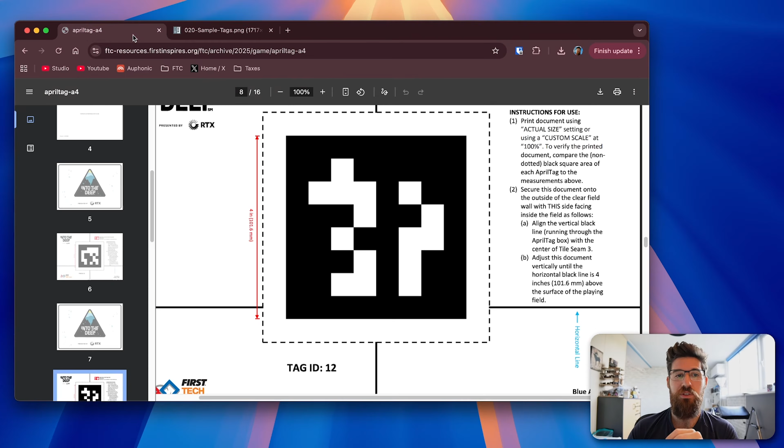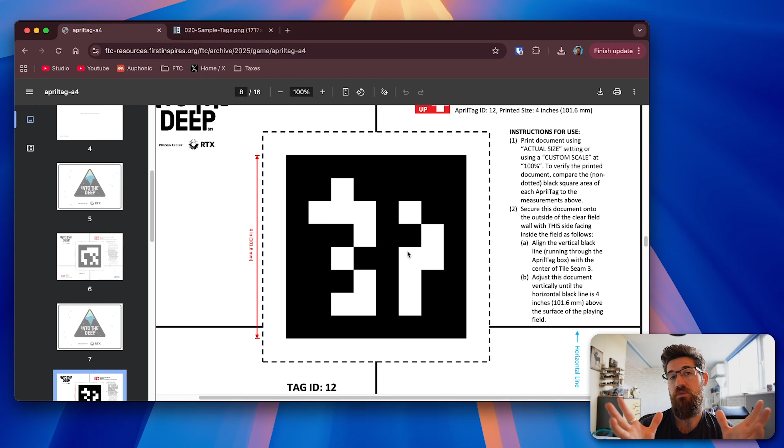Well, the cool thing about using an AprilTag is that it allows your robot to know where it is in physical space. So the robot can look at this tag, provided it's got a map uploaded of where this tag should be. Think of it kind of like a park map. Tag 12 might be the gorillas. Tag 13 might be the elephants. And if the robot sees tag 13, then it knows it must be near the elephants.

But not only does it know that it must be near the elephants, it can tell how far away am I from the code, how far to the left or to the right am I from the code, and how far up and down am I from the code. And not only that, am I looking up at the code, am I looking down, am I pitched, yawed, what's my heading like, or am I rolled as well?

So you can know exactly where your robot is in 3D space by looking at these predefined tags, provided that there's a map uploaded so the robot knows what it should look like inside of that space. So basically, an AprilTag answers 2 questions: what am I looking at, and how is it in relative space to me? The cool thing about AprilTags is they work even if they're slightly blurry or at an angle compared to your robot.

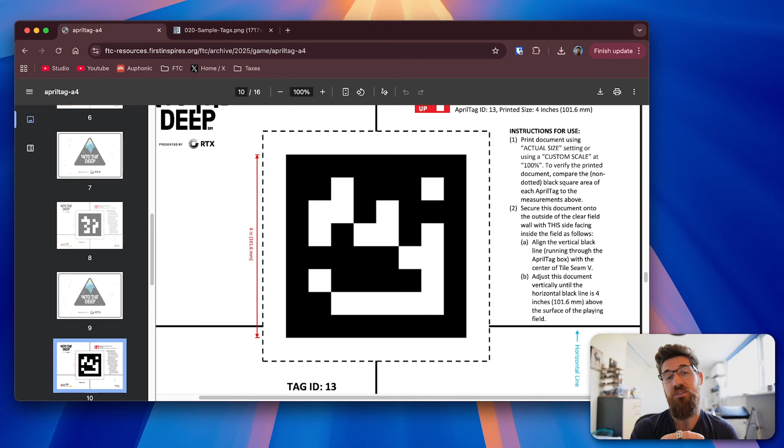In fact, they actually work better if they're at an angle compared to if they're directly face on to your robot. And they're really fast to process. You don't need a super high resolution to get these things up and running. So let's get started with the Limelight 3A and connecting this.

Now, of course, the easy way to get this thing connected, all you need is your USB-C connection that's already connected with USB-A to your computer. Go ahead and plug that in, and we're going to wait for this thing to boot up. In terms of my setup today, I've just got my Limelight set up on a tripod, looking down at some pieces of paper.

So now that our Limelight is booted up, we can go to http://limelight.local:5801. That should bring us to the local web section of our Limelight. Now, I'm currently running 25.1 as my software. If you're running something older, you might see something about network table or ignore network table switching, something along those lines.

So we are going to allow user pipeline switching, and I'm going to go ahead and select the 8th pipeline in here because this is just for a little bit of experimenting. If you are going to set this as a pure pipeline, you'd name it, but for now, because it's just a test, I like to use the lower pipelines just so we can throw it around.

Right now, it's in color or retroreflective. This is not the mode that we want to be in. Actually, I'm going to zoom in a bit so you guys can actually see. We want to be in the AprilTags connection. And honestly, without a little bit of tuning, it's already that good. It already recognizes that this is tag ID number 11.

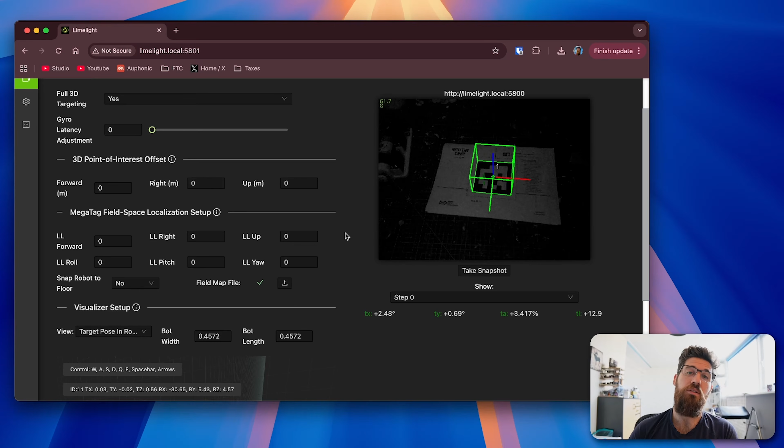So the MegaTag is the software, or rather the formulas that Limelight uses to know where your robot is in space compared to an AprilTag. This is specific to FRC and FTC, as far as I'm aware. The field map file, depending on what you're using, for a Limelight 3A, it already has an FTC field put in, but you are welcome to upload your own custom field maps. So you can put in your own field for this.

Snap robot to the floor. I like to click this on yes. And let's go ahead and actually set this up so we can have a target pose and field camera. And I'm going to click hide the info for now. Now, you can use the W, A, S, and D, and Q brings you down, E brings you up, and then you can use the mouse click to change your view.

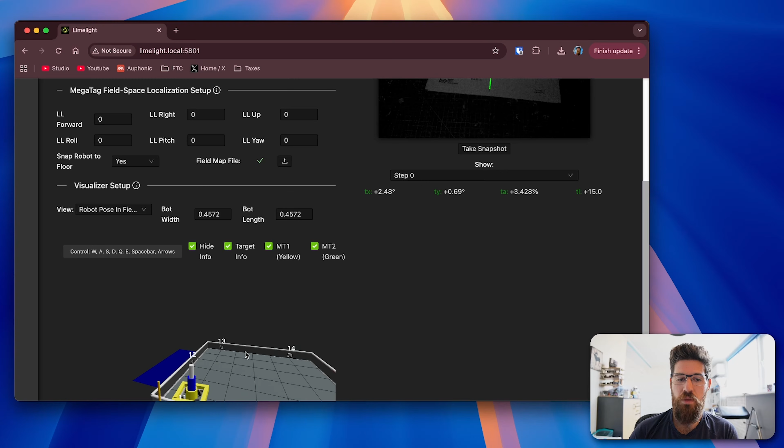So we can see here that this yellow space is actually our robot relating to tag 11. So we can actually see our robot in space. And as we move the Limelight around, left and right and forward and backwards, we can actually see that we move forward and back.

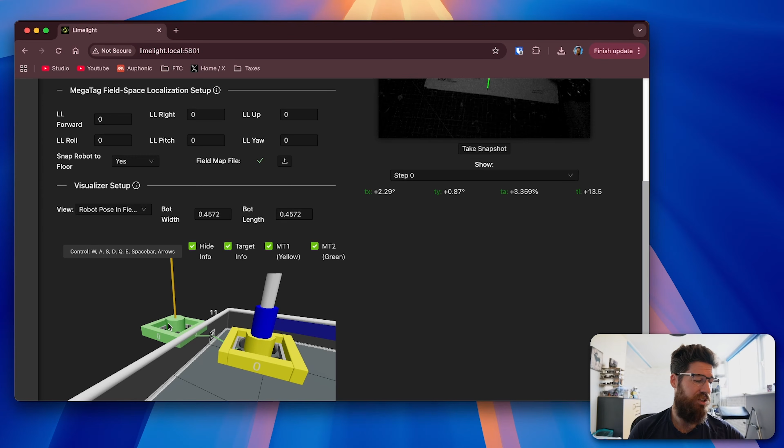Now there's two robots in this space. There's a green robot and a yellow robot. MegaTag 2 requires you to be able to input your robot's yaw in your code. And I'm still waiting on Limelight's response for the MegaTag 2 in that whether it's used specifically for FRC or FTC. In FTC, at this point of recording, I would turn it off and only focus on MegaTag 1 because MegaTag 2 seems to always put my robot directly to the left of the AprilTag, which is kind of odd. So for example, it's not just directly behind.

Watch what happens when I switch over to AprilTag 12. Oh, we have that currently turned off. So I'm going to turn that ID filter off. You notice that again, MegaTag 2 seems to be giving me strange results, not what I would expect, because right now my robot is head on, but it seems to be off. So I actually turned the MegaTag 2 tag off.

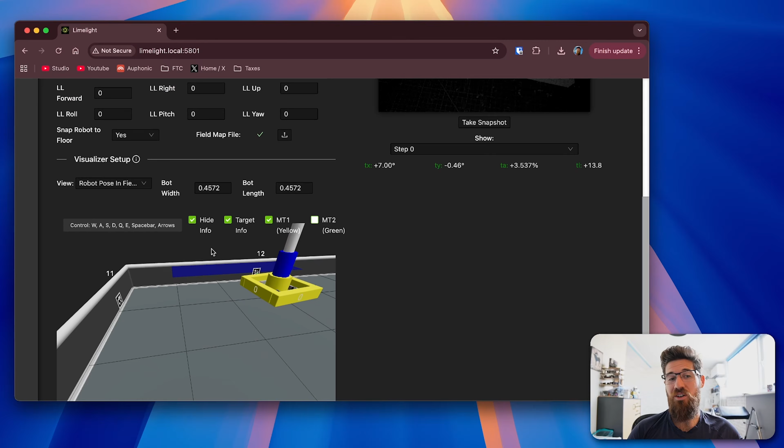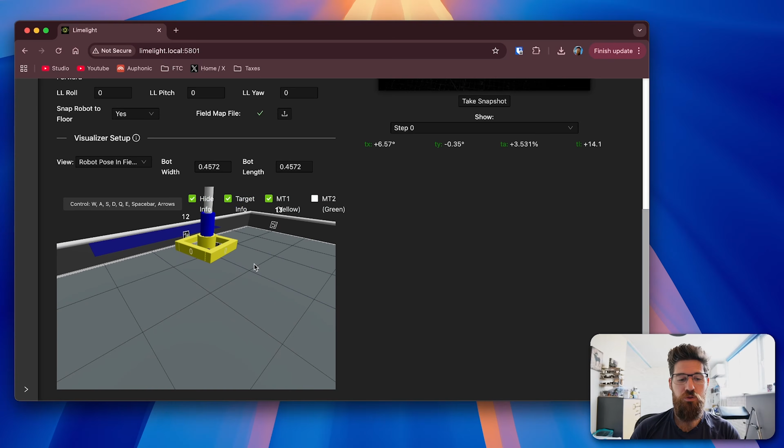So let's talk about what this field space localization setup is. If you are using the Limelight, you have to put the Limelight into a CAD model of your robot. Well, not have to, but I strongly recommend it because it allows you to actually set up your offset. When we're looking at this space, the Limelight assumes that you are in the direct center of your robot. So right now, it is assumed that it is in the direct center of whatever your robot space is. Now, I know this shows up in an FRC robot, but in FTC, it doesn't really matter. This is just an example.

So you can use these offsets here to say where it is on your robot. So let's say that our Limelight is actually to the right of our robot a little bit. And this is in meters. Okay? So let's say that our Limelight is actually 10 centimeters to the right. So I'm going to put 10 centimeters to the right. You notice that our section just changed.

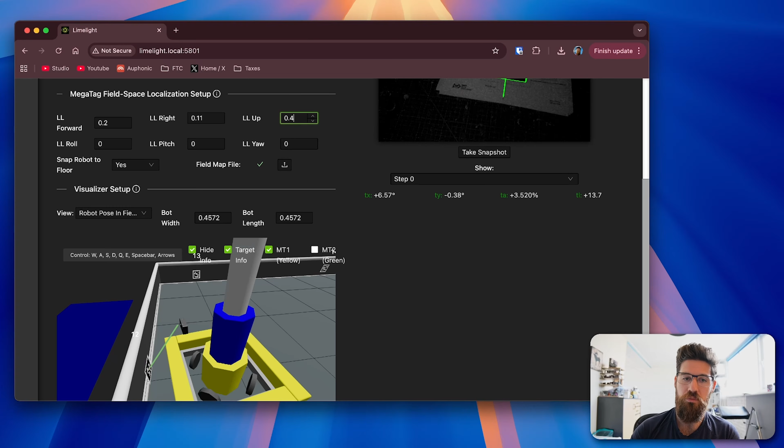Let's say that your Limelight is also near the very front of your robot, but it's almost at the very front. So let's say we have 0.2 to the front of our robot. And then up, rather than being on the very base plane, it's again another 0.2. So we can actually see the Limelight itself has actually moved its space on our robot. Maybe let's put it up to 0.4. So we can actually see this quite a bit higher. And now we can see exactly where this Limelight is in space relative to our robot, which is pretty cool.

You can also go ahead and set your yaw and your pitch of your robot. And the reason I say using your CAD software on this is that you can actually calculate these things directly from the origin point in the middle of your robot. So for me, I've got a little bit of a pitch angle. I would hope you would not set this up to have a roll that would be a tilt this way. So for instance, if I were to look at my camera here, this would be a roll, this would be a pitch, and this would be a yaw or your heading.

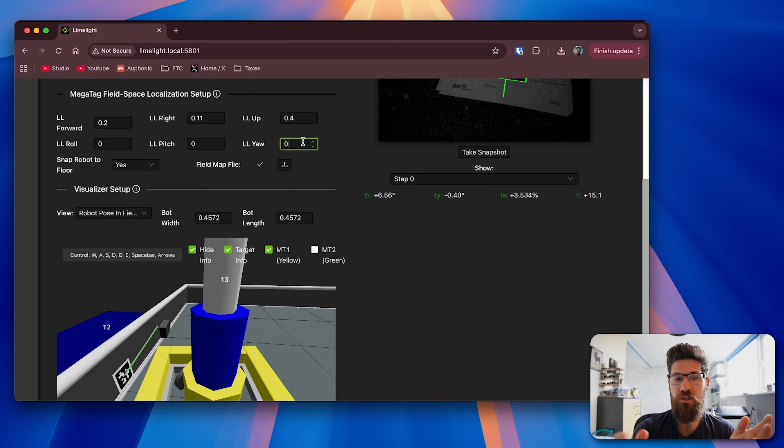So in my case, my yaw is the exact same as my robot because I don't have it set up on an angle, but I do have a pitch angle. So I might say 10 degrees. Actually, this one's probably negative 30 degrees. So I've got it pitched down. And I'm going to do negative 15 because that's about what my tripod is actually set at. So we can see that according to my current setup, I'm basically right beside the AprilTag. And as I move backwards, we can see our space sets up a little bit more.

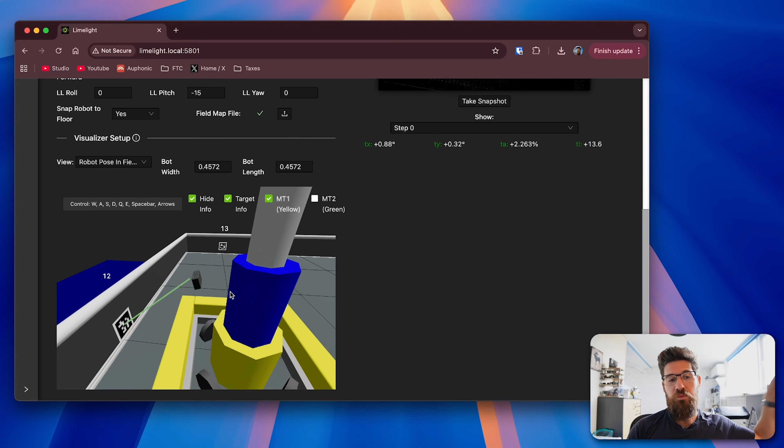So you need to have these things set up perfectly related on your CAD software in order to have these give you accurate and reliable settings. But as I actually start moving around, we can see that our Limelight moves and is quite resilient to be able to track this AprilTag, which is really, really cool. There are other views you can use inside the visualizer. Of course, there's target pose in robot space, which means that you are currently in the robot's field of perspective and you are looking at what the final point is.

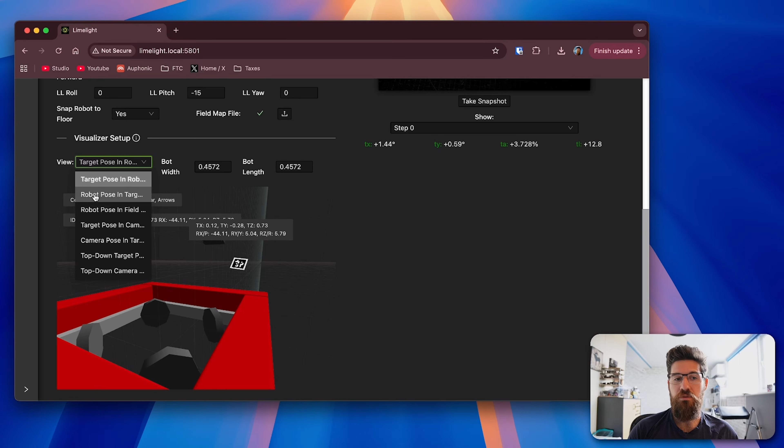So in this case, we are the robot and we're looking at where the AprilTag is in respect to us. The robot pose in target means that we are viewing from the target and we're looking at what the robot's pose is. The robot pose in field, let's go ahead and hide that info, is the one that I use the most frequently, in that the robot is going to move around and we are in a field-centric view.

The target pose in camera is, again, keeping where the camera's view is, looking at that, similar to the robot. The camera pose in target is looking at where the camera is in relation to that QR code. The top-down target is just an XY coordinate. This would be more useful if you're using 2D tracking, just where this thing is in space. And then a top-down camera, but again, where the camera is relative to that point. So it depends on whether you're going to be using 2D or 3D for that kind of localization.

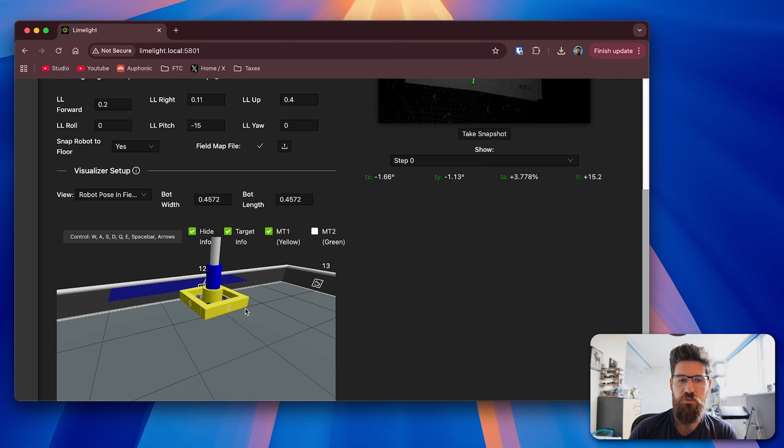So I'm going to go ahead and go back to the robot pose in field, and I'll go ahead and hide this info. Again, I like to turn off the MegaTag 2, or at least for FTC, because it gives me some unreliable data. Now let's go back up to this 3D point of interest offset. What this is, it allows you to put in something in the field that has a known distance away from an AprilTag. So let's say, for example, you have a bucket that is always placed 10 centimeters to the left of your QR code and 5 centimeters up of the QR code, and you want to target this.

This data down here that the Limelight's going to return is your target X compared to where your robot is compared to the AprilTag, the target Y, the target area, which is the percentage of the screen that it's taking up, and TL stands for target latency in milliseconds, so how long it takes for you to actually get that information back. So right now it's targeting that exact center related to our crosshair.

But let's say that you're setting this up, that you want to use the AprilTag to be able to know where the bucket is in space, and you want to be able to place something inside that bucket every single time. So what you can do is you can actually set this up. Let me move this over a little bit so we can see both. If you know that the object is always 10 centimeters to the left of this AprilTag, you can use -0.1 as an offset. And then it's always 5 centimeters up, so -0.05 meters up. And now you notice that crosshair has changed, and it's always going to focus on that exact section.